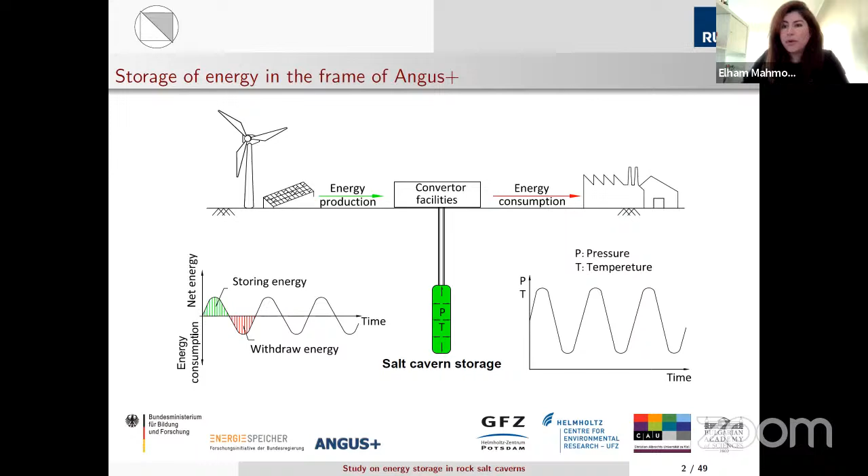But rock salt, as a viscous material, is very sensitive to temperature, and can show movement and deformation from this loading and unloading, and from temperature changes. So we need to tackle the problem from different aspects. We don't explicitly know how the material reacts to this type of cyclic loading and unloading, which is not cyclic with a frequency higher than 8 hours, and it's cyclic not just mechanically but also in temperature.

That's why, in the bigger research group, we made an experimental investigation as one important pillar for the project. We decided a PhD should work on how a triaxial cell and a creep test can be performed on samples of rock salt.

The other aspect is that we can observe this experimentally, but we also need to make a numerical model to predict the behavior before putting compressed air or hydrogen inside the cavity. That's why we also thought about constitutive model development.

Another PhD has been assigned to develop a constitutive model able to consider all of these aspects I was speaking about. The last part, of course, is about analyzing the system.

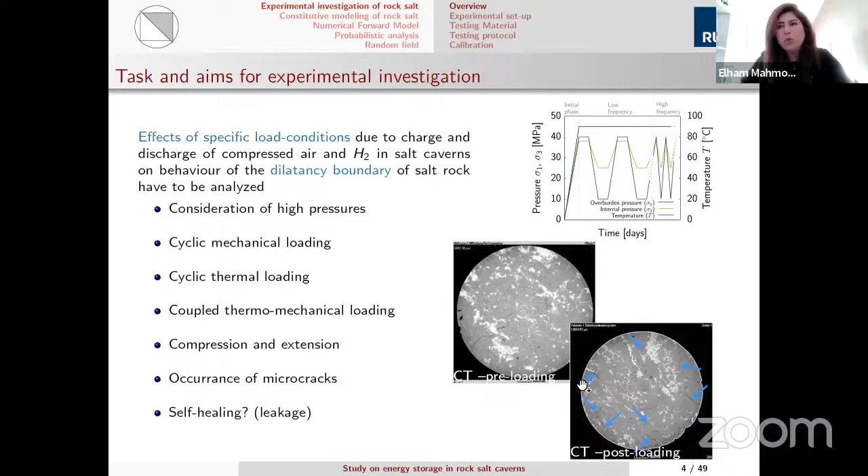Just mentioning here how I provided some information for this analysis was that I had the numerical analysis, and I made some first preliminary work to see how the stress paths look like when we are loading and unloading the system, and also in different areas around the cavity, how the stress path is different. So we could give this as a boundary condition to the device, and ask the person who was responsible to simulate or try to simulate this stress path.

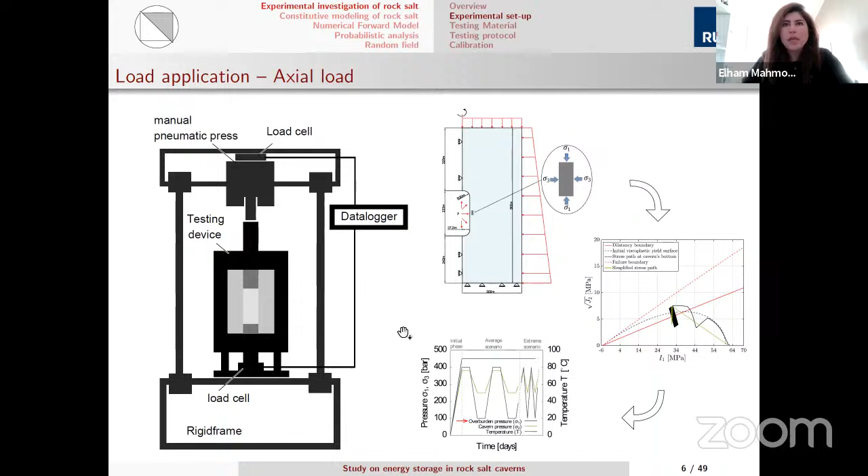Here also you can see how the rock salt looks like, actually very crystallized, but from different areas from Germany we got different samples. This one that I show here is from Sondershausen mine, a salt mine in Germany, where we could get the data from 500 meters underground. So it's not normal geotechnical depths of excavation that I'm speaking about.

Moving forward, I told you about the constitutive model and how and why we need a constitutive model. Actually, I tried to put them in these three pillars, why a new constitutive model was needed. Because beforehand, we had some constitutive models that were working for the creep, of course, and some that can also model damage in the elastic behavior and cyclic behavior. Also, there are constitutive models that can work for viscoplastic materials like rock salt. But all in all, there was a lack of that.

You can see we have different loading conditions in such cavities. So we had to consider a new constitutive model, which is a combination of the other available ones, but it came also with its own development works and challenges, because we wanted to know about the fatigue after cyclic loading. At the same time, we wanted to know about the creep behavior, because we have constant loading during every 8-hour shift, or if it's about hydrogen, even longer shifts of constant loading. So the creep may happen under that loading, and of course monotonic loading during the charge and discharge of the cavity was the boundary condition that we had.

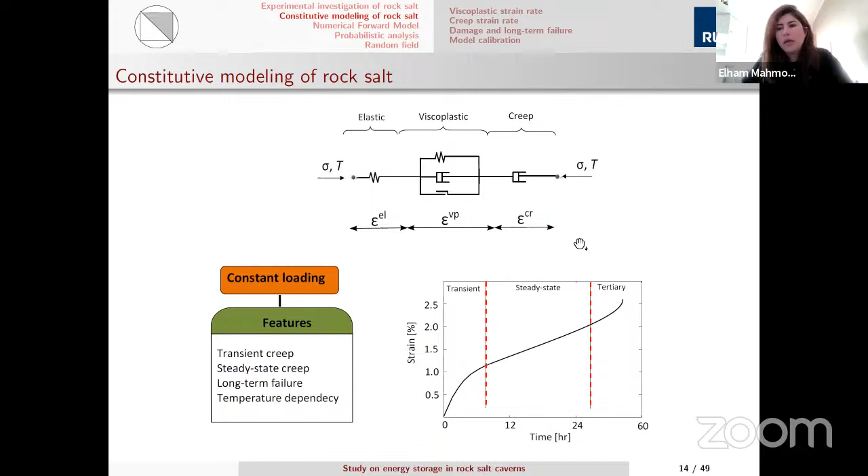So let me just jump over some of the slides. Otherwise, my time would be very, very limited for the part that I'm more interested to show you. This is also about the fatigue part of cyclic loadings.

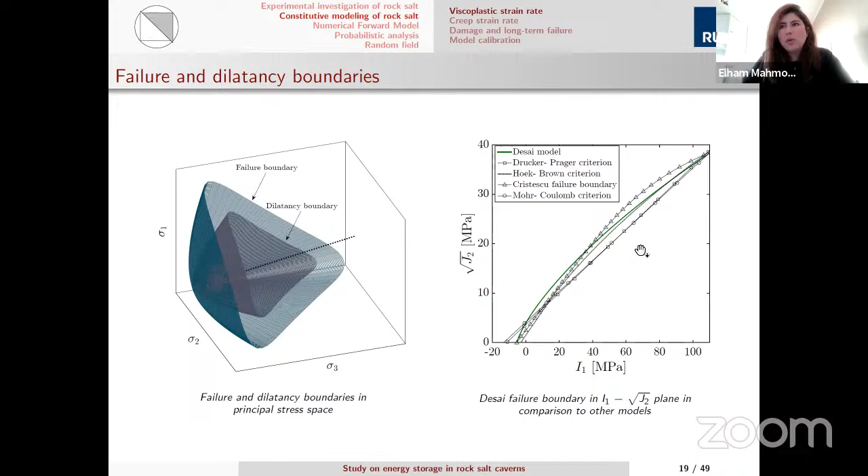I also put here the dilatancy and failure boundary of the model, which was developed by my colleague González. We worked on this model in the direction of having firstly the basis of a viscoplastic model, which we call the Desai model. Of course, one very important aspect about rock salts is volumetric change in the volumetric strains, and after a certain boundary, we have dilative behavior.

This green line here shows how the dilation and compression zones are different. Under this line is compressive behavior. In the community, in practice, they always want to stay under this line, but of course there are cases where the stress passes it and goes into the dilative zone.

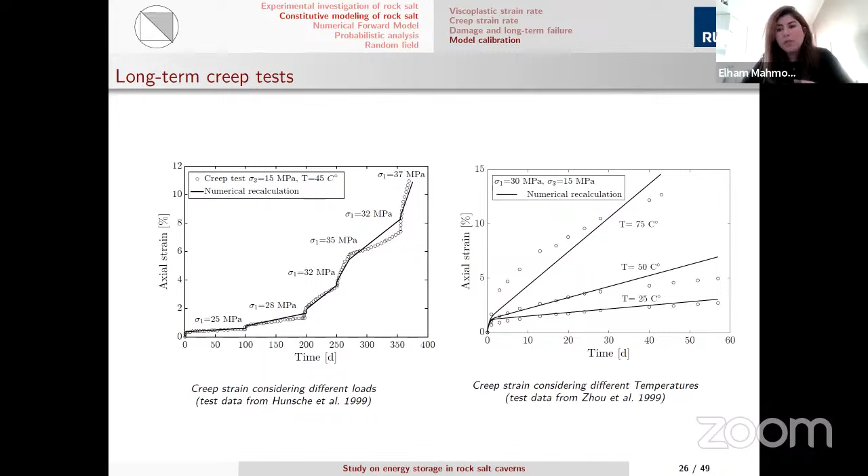This is how I started modeling the cavity. This is the area where the cavity normally takes place. For the Sondershausen case, it was almost 800 meters under the ground, with 500 meters of overburden, but some excavation happened at 800 meters. The rock cavity has 233 meters of height, going deep.

This cavity is simplified in shape, but the shape is almost the same, not much irregularity, though maybe on the bottom side there are some irregularities. We also did some studies with master students on how these affect the stress distribution—quite interesting work, but unfortunately I cannot share it because it was under contract with some companies in Germany.

Let me bring you here also with this 75 meters of diameter—this is the model I made. It's axisymmetrical, a numerical finite element model, with different points around the cavity that were points of interest for us.

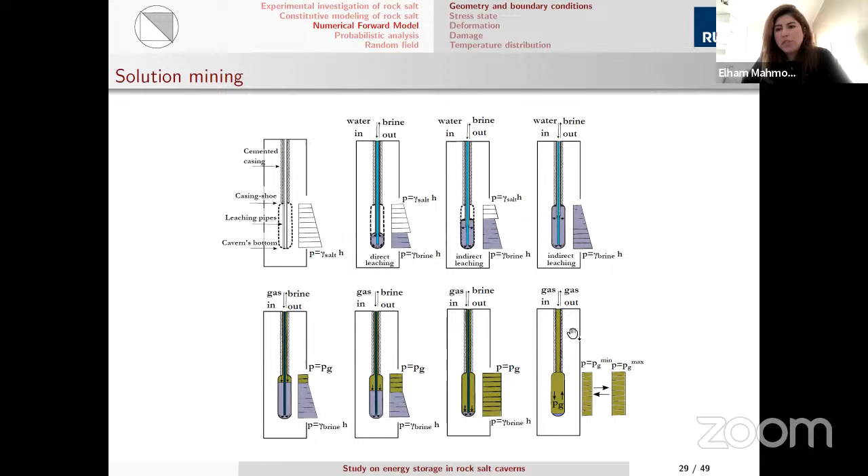After that, the charge and discharge happens, which is mainly the cyclic part of the job. This is how the loading during the time has been modeled, simplified of course. This is the PI that I applied, and this is the graph for that.

Important for people in practice is always how much they are allowed to come down in this graph. The P min value is always a point of interest for them, because they want to know how much less can be stored in the cavity.

This is something very interesting about rock salt storages, because normally if you're working with tanks or any other type of storage, you're thinking about how high the capacity is, and how much pressure or temperature I can apply to the system, because the walls or boundaries can take it. But here specifically, the minimum is also important.

Why is it so? Because as I said before, rock salt shows some viscosity, and without any loading from inside, the hydrostatic pressure in the body of the rock mass is high enough, and with time the viscosity will force the cavity to close. This is what is really happening in many different areas.

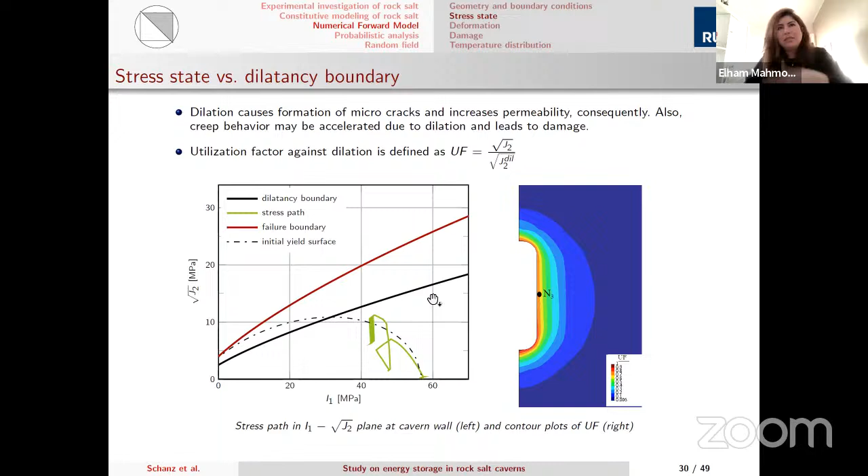Which is not something desirable. So what we can see here is that I have tackled the problem in several ways. One is that we do not want to have the problem of dilative behavior, staying under the dilatancy boundary and in the safe zone, because we do not want to get any micro cracks. Also, we do not want to have any volume loss, which is another problem, a serviceability problem. Both of these problems need to be solved and considered in the reliability cases.

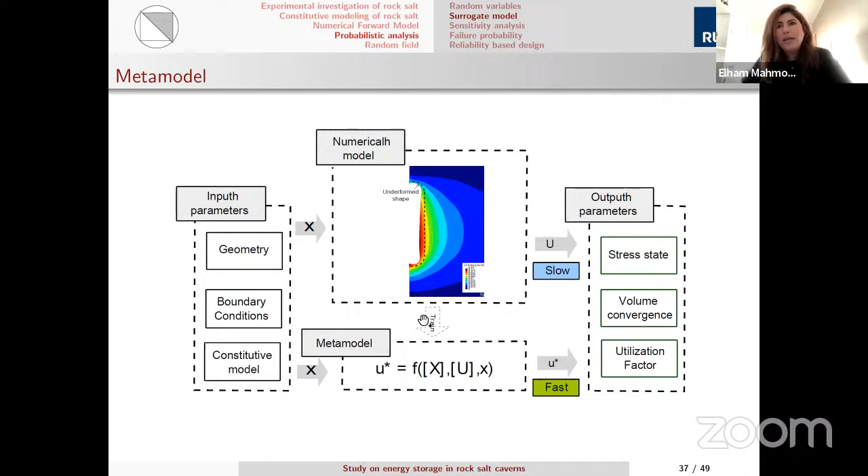I have to go a little faster and show you how I considered the parameters for this analysis, because the parameters are not very certain for us, and there is a high range for all of the parameters involved - we are speaking about more than 30 parameters here. All of them need to be identified, and for identifying these parameters we did some sensitivity analysis, which is systematic and global, because all of the parameters were also correlated somehow with each other.

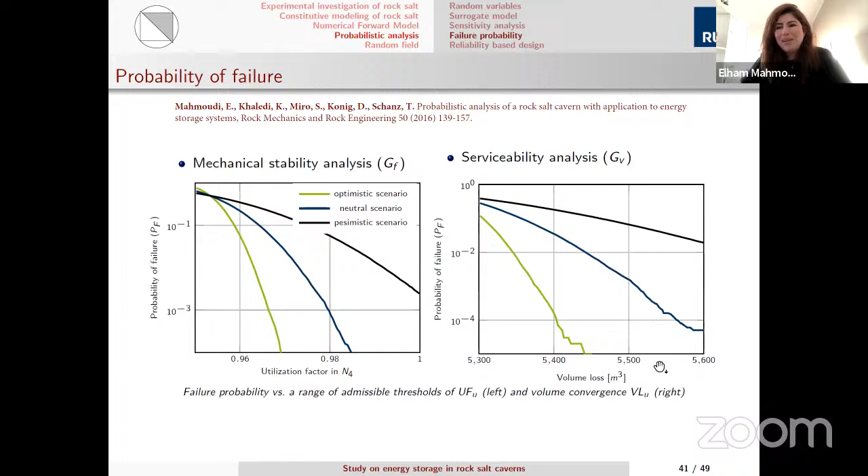After that, we considered some reliability-based aspects to inform the client and the operator, that in taking these values we are delivering to them, how much chance are they also taking. They were interested in serviceability and stability at the same time. So they wanted to know how much of the values for the minimum pressure they can apply.

So I had to come up with some concepts in reliability which are also able to do the calculation very fast, because if I wanted to do Monte Carlo calculation, tens of thousands of calculations were needed, and every finite element calculation with this extensive constitutive model was taking me more than one day. So I could not afford that, and I came up with one surrogate model idea, and also some more advanced reliability analysis idea, shown here as subset simulation.

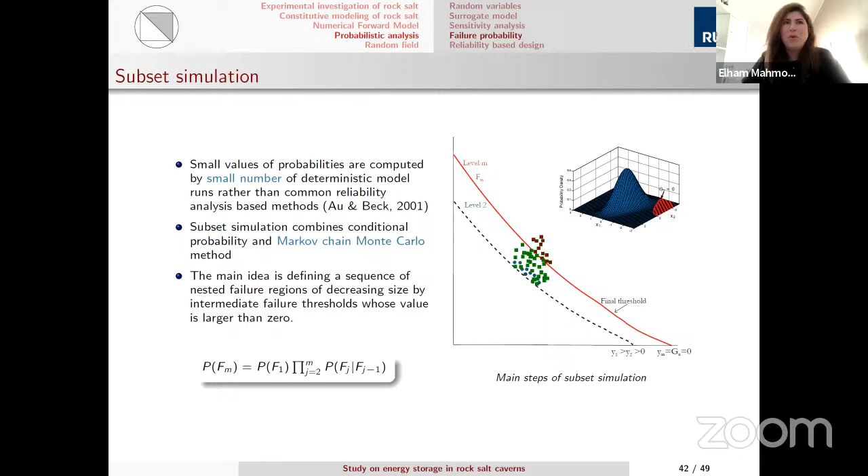But let me go faster over this - you can find all of this information in the papers, where we got data like this for the practice. When I applied the reliability for the specific type of structure, the index of reliability, then I could say how much pressure the practitioners on site should apply while staying safe. This is how our journey started, from very specific questions, ending up with some data analysis and probabilistic analysis.

I hope you got some ideas about the job. It was not very detailed, but I assume that if you have any more questions, I would be happy to answer. Thank you, Alessandra, I think it's time.

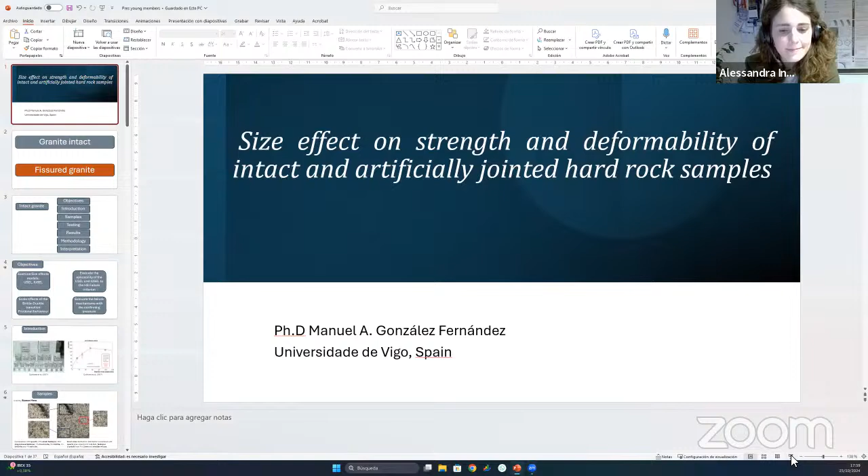I'm going to talk about the size effect on strength and deformability of intact and artificially jointed hard rock samples, which is part of my thesis. Due to the extension of my thesis, I only focus on these two parts. So we start with the intact granite. I have divided this presentation into 7 different parts.

Let's begin with the introduction. What was the reason to look into the scale effects on triaxial tests? The laboratory I used to belong to at the University of Vigo performed a past study on the same rock, granite Blanco Mera, in this case on UCS tests. They found an ascending-descending trend of the peak strength with increasing diameter. This trend doesn't fit the typical descending trend with incremental diameter, so we decided to perform the same study but extended to a triaxial compressive test.

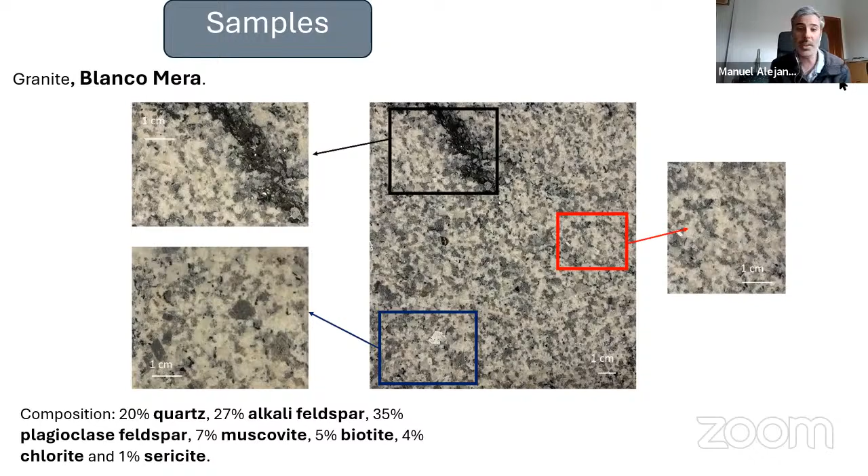So we used the same granite as the past study, the Blanco Mera, whose composition is 20% quartz, 35% plagioclase feldspar, 27% alkali feldspar, plus muscovite, biotite, chlorite, and sericite. Regarding grain distribution, it is scattered with quartz grains ranging from 1 to 6 millimeters, feldspar crystals ranging from 1 to 3 millimeters, and smaller micas.

So we decided to use for this study 4 different diameters: 84 millimeters, 54 millimeters or NX diameter, 38 millimeters, and 30 millimeters. During the test, we also measured deformability using two different methodologies: the first was measuring with LVDTs the plate-to-plate distance, and we also measured deformations with axial and radial strain gauges.

This is not the main objective of this part of the study, but in the future we will see what was the reason to measure the deformations.

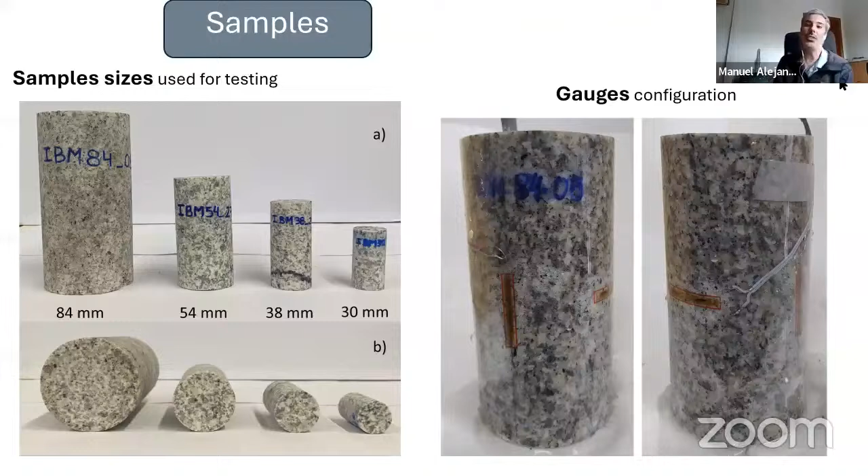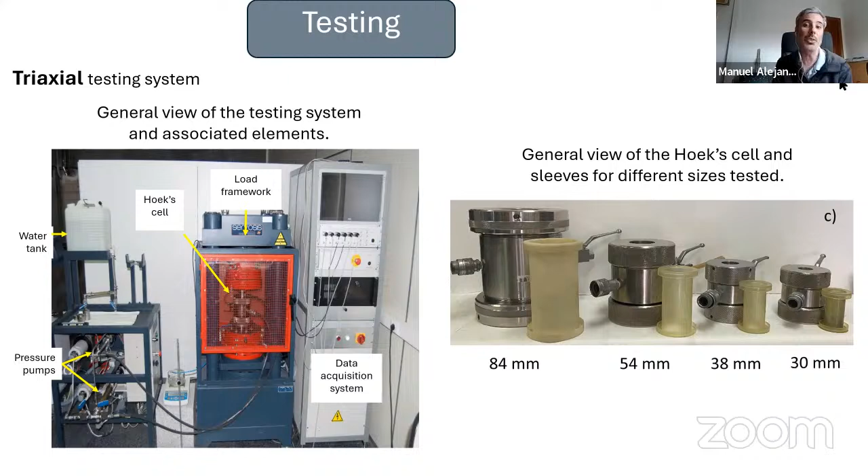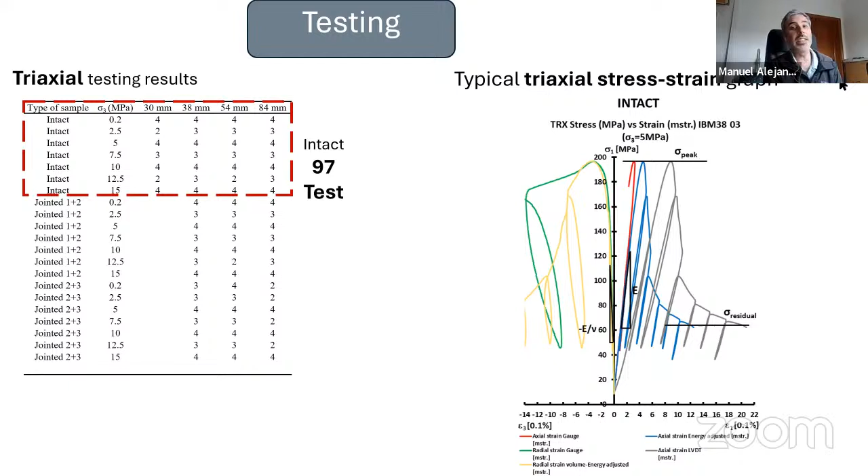Now here we can see all the tests performed in the whole study on the granite, both intact and jointed, but here we only focus on the intact ones. We performed 97 different triaxial tests for intact specimens. On the right, we can see the typical triaxial stress-strain graph, showing the curves of stress-strain, radial and axial, and how the parameters were derived: the peak strength and residual strength here, and the elastic parameters for the part we will see in the future.

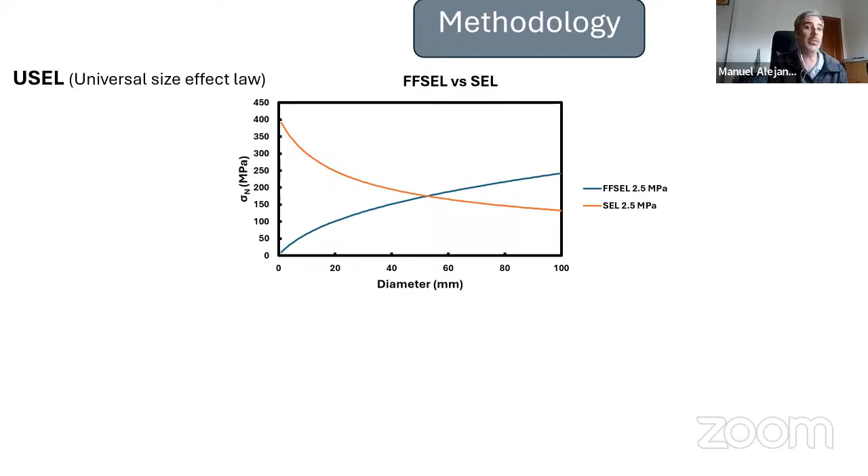So to analyze these results, we decided to use two different methodologies. The first one was the universal size effect law, which consists of two different parts. The first part is the descending trend proposed by Bazant, called the size effect law.

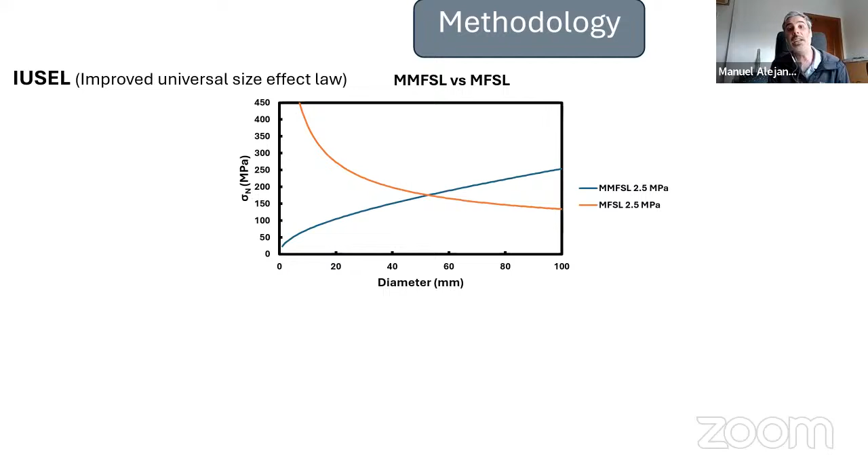And the ascending part is also proposed by Bazant, the fractal fracture size effect law. So the value of the strength will be the minimum value at each point between the SEL and the FFSEL. We also used the improved version of this universal size effect law, which consists of two different parts: the first, proposed by Carpinteri, the multifractal scaling law or MFSL, which is the descending part.

The ascending part is a modification of the previous one proposed by Carpinteri. This modification was performed by Masoumi, and it's called the modified multifractal scaling law, or MMFSL. So like in the USEL, the value of strength will be the minimum value at each point between the MFSL and MMFSL expressions.

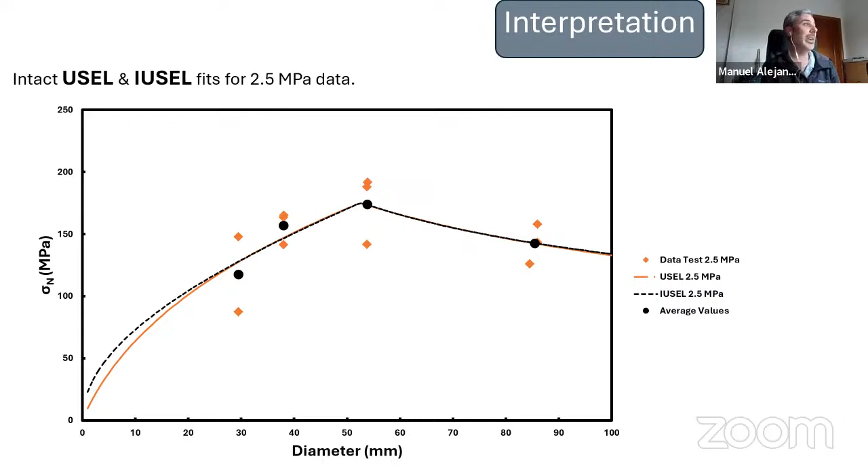Here we can see a fit of the values obtained for the tests at 2.5 megapascals of confining pressure. Both models, the USEL and the improved version, fit very well with the results obtained, and mostly overlap. So why did we decide to use the improved version and not keep the original? This happened because when you make the fit for larger diameters, the original USEL tends to zero at larger diameters.

That is not the reality. We know that a rock mass with infinite diameter also has a strength. So the improved version is such that when we tend to large diameters, it tends to a constant value that matches reality.

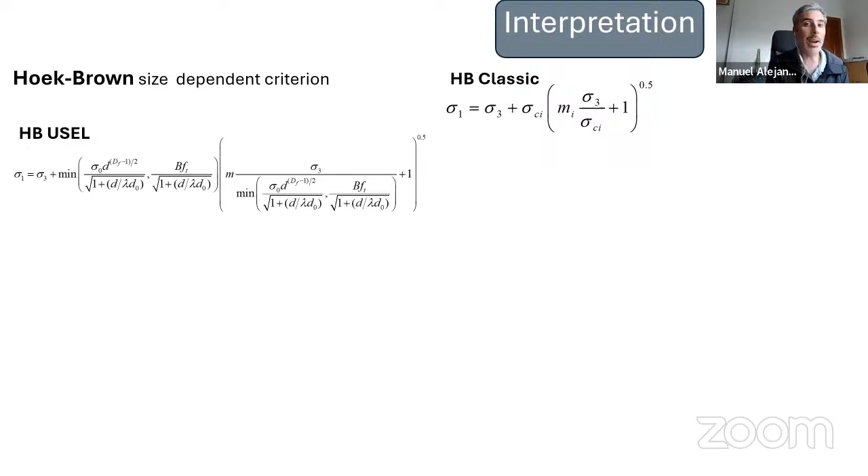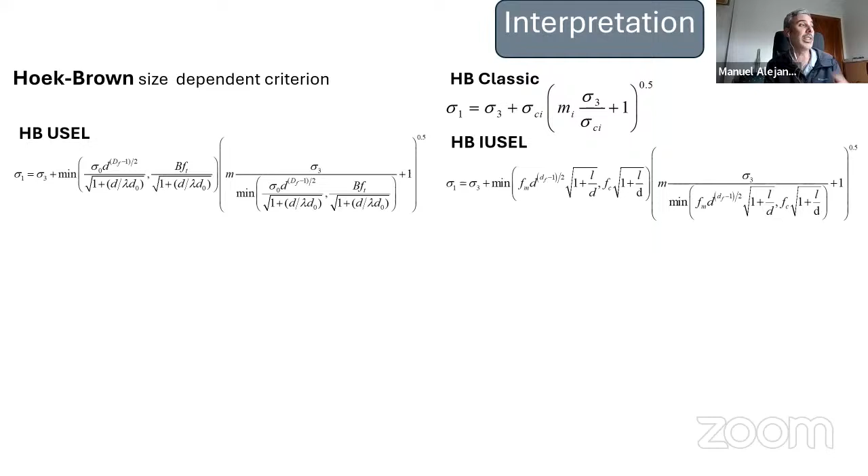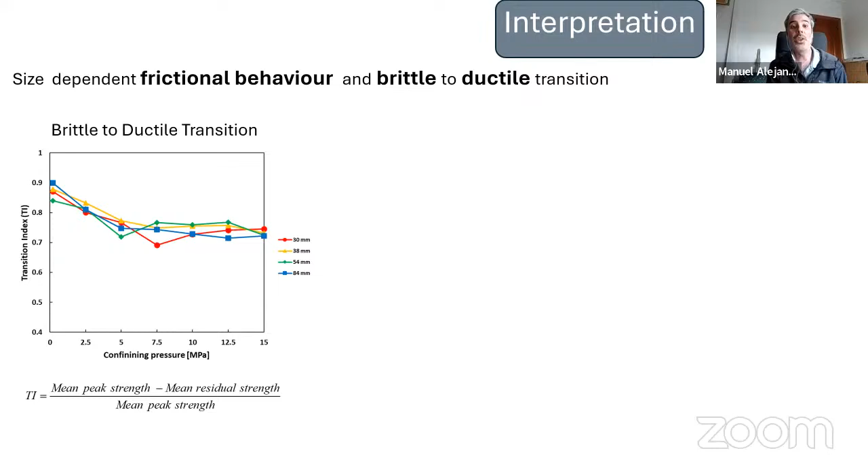We can observe here that our rock used, the granite, is very brittle, because it's close to 1. And we can see a transition to a more ductile behavior with the increasing of the confining pressure.

We have also measured the shear band angle of all the tests performed. Clearly, the shear angle at near 0 confining pressure was impossible to measure.

We observe for all the diameters used that the shear band angle decreases with increasing confining pressure. So with this data and with the expression of the shear stress and the normal stress...

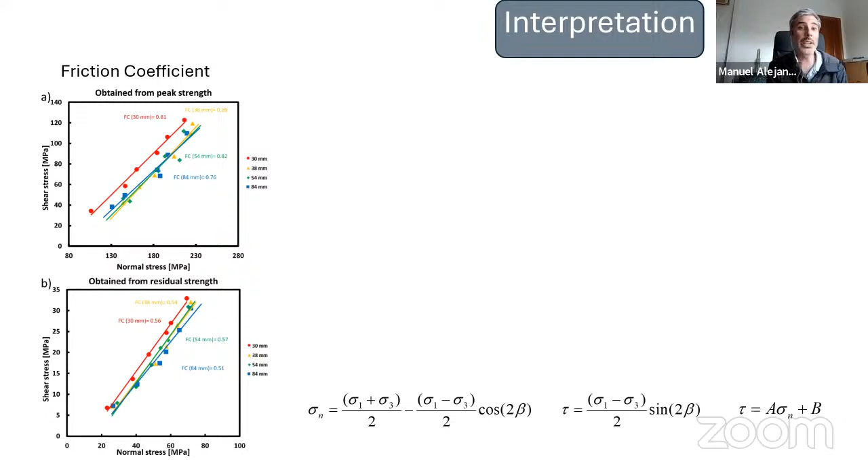We can plot the friction coefficient both for the peak and the residual strength, and obtain the values for each diameter.

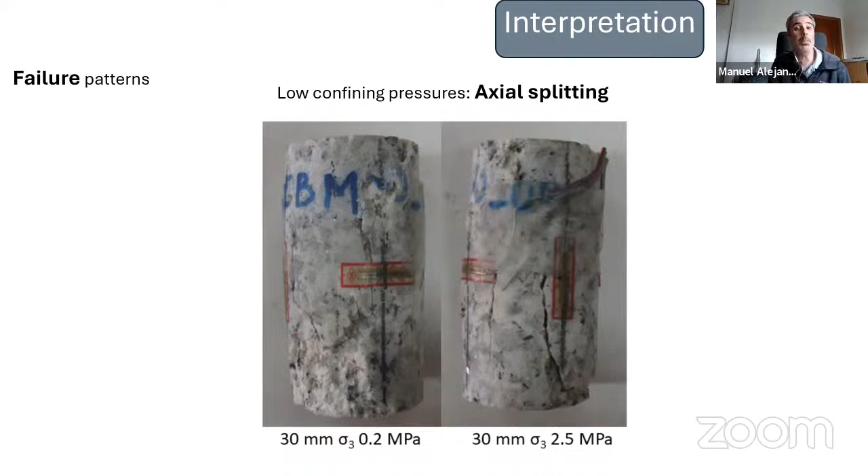Regarding the failure patterns, for low confining pressures we find axial splitting, moving through a mixture of axial splitting and starting shear banding for mid confining pressures, through to a full shear band pattern at higher confining pressures.

So we move to the next section, the fissured granite section, also divided into 7 different parts. So which were the main objectives?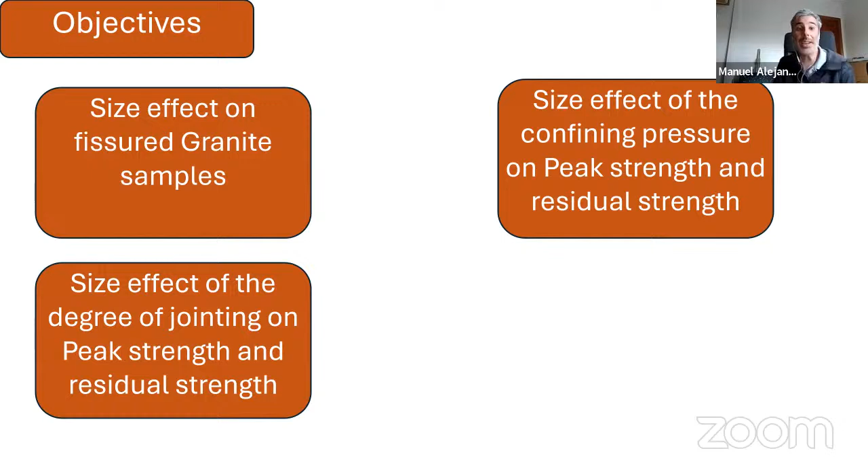The first was to examine the size effects on the fissured granite samples, examine the size effect of confining pressure on peak and residual strength.

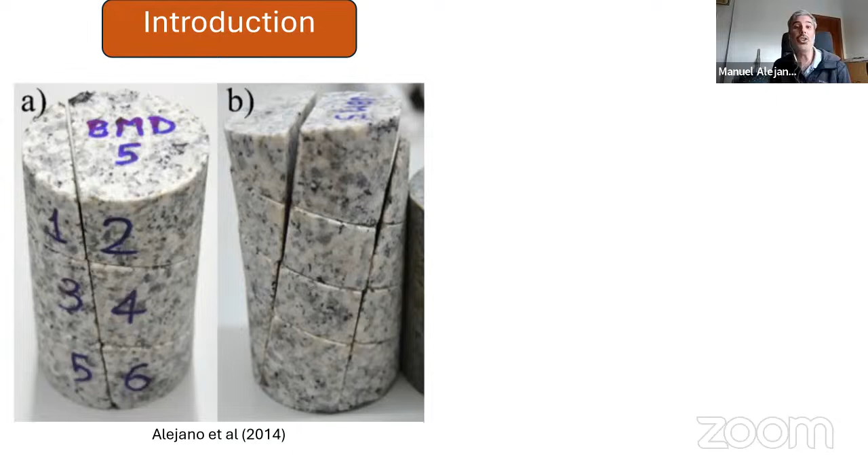Also examine the size effect of the degree of jointing on the peak and residual strengths, and examine the size effect on the deformability of the jointed samples through the elastic parameters. In our laboratory, we have performed in the past a study with the same granite, the granite Blanco Mera, jointed tests, but they were only focused on...

NX diameter of 54 millimeters. Why did we perform this study on a hard rock?

This was because there were not many studies on jointed samples, and the existing studies were based on artificial materials like cement or plaster, or soft materials like gypsum. So our laboratory decided to perform this study.

And we took another step to see the scale effects on jointed samples.

So I'm going to explain briefly how the samples were obtained. Here we have the typical block for sample obtaining, and we mark the subvertical joints.

Then we cut it using a saw, and then we clamp it together to proceed to drill with a core driller.

Why should we perform this first? If we obtain the core first and then perform the subvertical joint, we obtain a reduction in the diameter of the sample, so it will not be usable to obtain results.

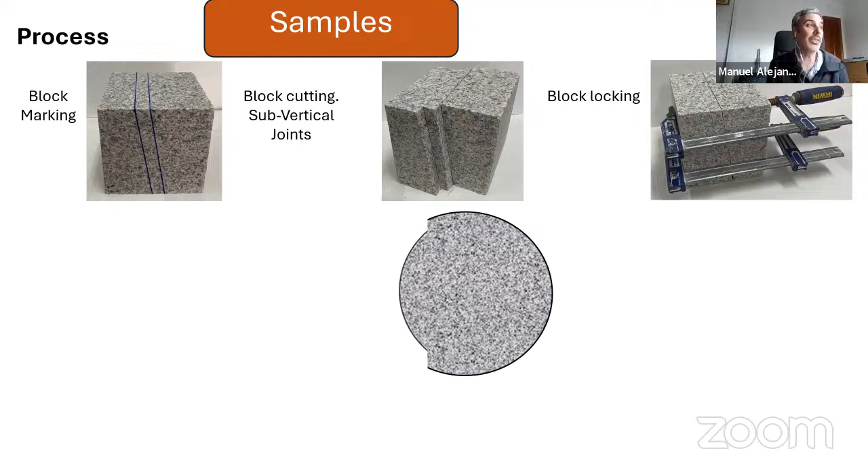So we obtain the cores, where here we can see the subvertical joints, and we use electrical tape to grab the core.

We cut the endings to obtain more or less the length of the final sample.

We proceed to grind the ends to obtain a smooth surface, and then we secure this sample to a 3D printed mold to give the proper angle to the subhorizontal joints.

Then we cut the horizontal joints, and to finish and conclude we have the sample shown here in the next slide, and we are going to see the different samples used in this study.

We have diameters from 38 to 84 millimeters, like in the past study. We don't use the 30 millimeters.

At the left, we are looking at the 1+2 sample with one subvertical joint and two subhorizontal joints, and the 2+3, meaning two subvertical joints and three horizontal joints.

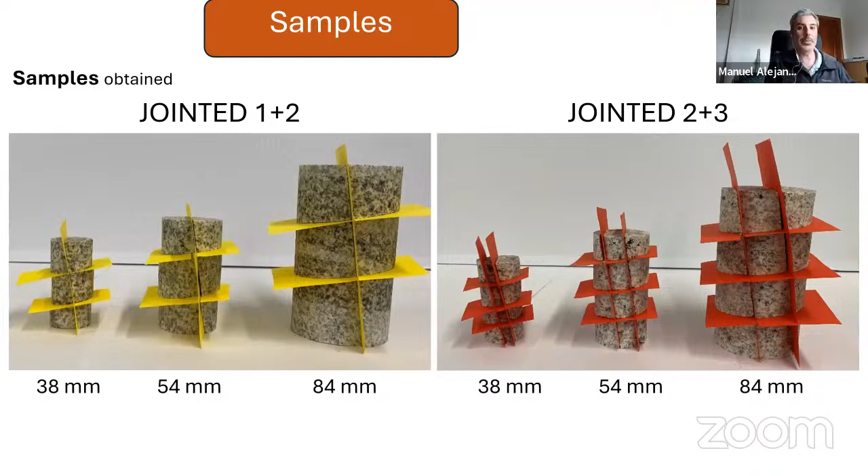The triaxial test system was the same as in the past part, with different Hoek cells used and the corresponding sleeves.

As I commented before, we performed 97 triaxial tests for intact samples, 72 tests for jointed 1+2, and 69 for 2+3.

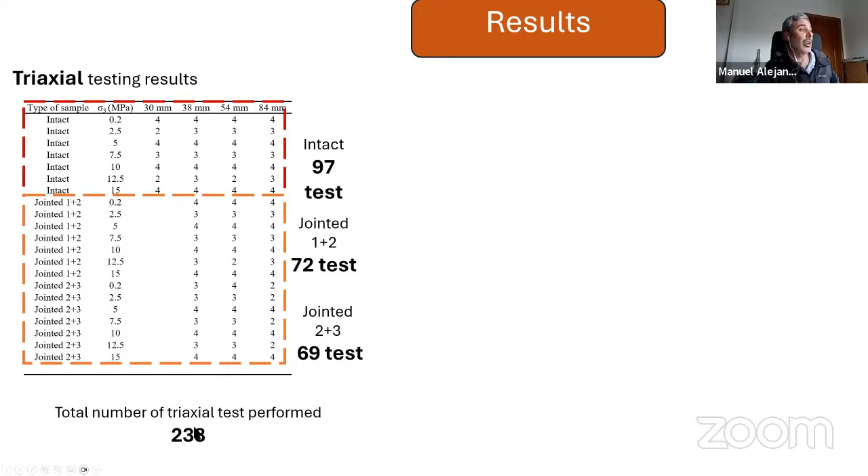In this case, for intact samples we used to measure the deformations using strain gauges and...

LVDTs, but in this case for the jointed specimens, we only use the LVDTs.

Because if we attach a strain gauge onto a piece, it will not give us a realistic measure of the strain, it will give us a strain measure of only the rock part, not the whole specimen.

So here we can see the different average results for each sample diameter and confining pressure, for intact, for jointed 1+2, and...

2+3, sorry. As we can see, when we increase the confining pressure, we can also see that the peak strength increases.

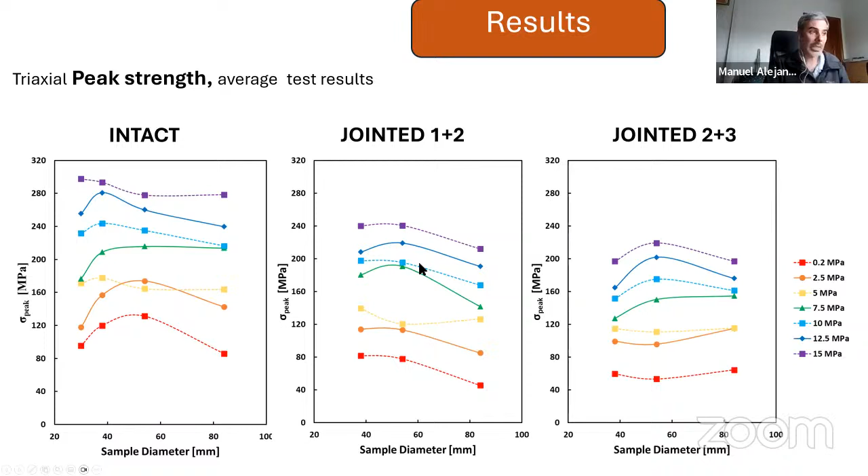And here we can see for the jointed 2+3 and 1+2 that there is very little descending trend for the peak strength. Also for the residual strength, we can see that it's increased with increasing confining pressure, and we can see here clearly that the residual strength has barely been affected by the size of the sample, and has a slight effect from the level of jointing of the specimen.

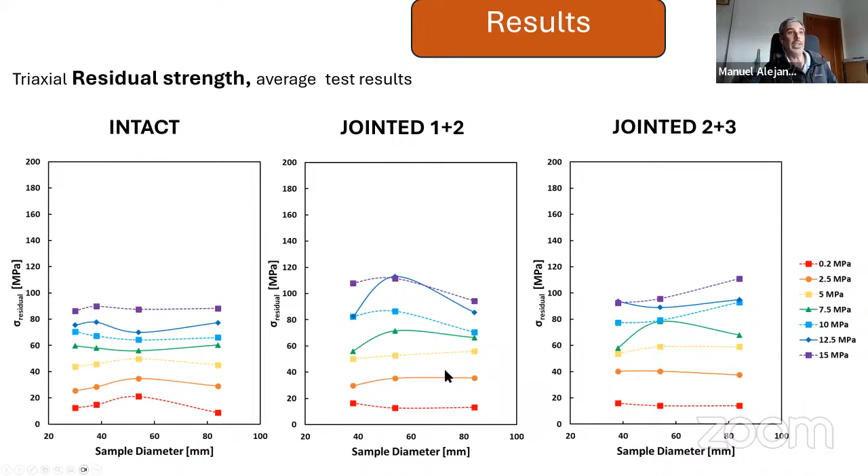So we decided to use the Hoek-Brown criterion for rock masses to interpret the results of peak and residual strength, because it has the GSI parameter that is closely related to the level of jointing. So we thought it would give us a good interpretation of the results.

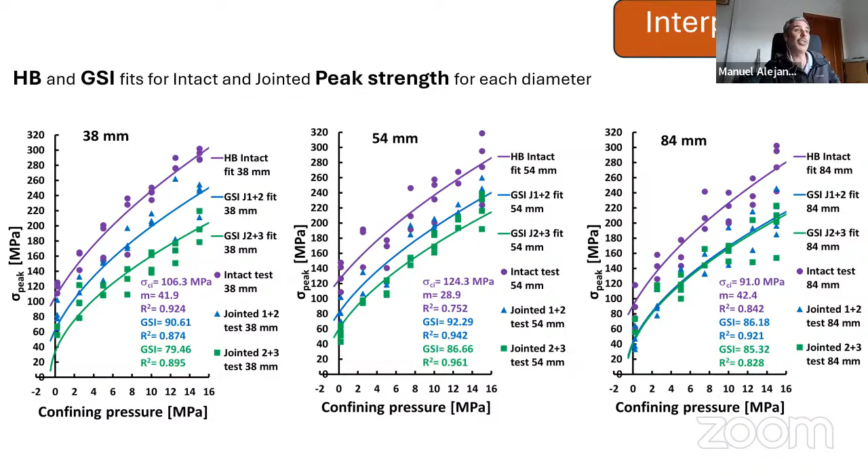So here we have the results obtained for each diameter, and we can see that for peak strength, the results decrease with increasing level of jointing. Something clearly remarkable is that for 84 millimeters, for large diameters, the level of jointing has less effect on the peak strength. So when we increase the diameter, the effect of the level of jointing tends to decrease.

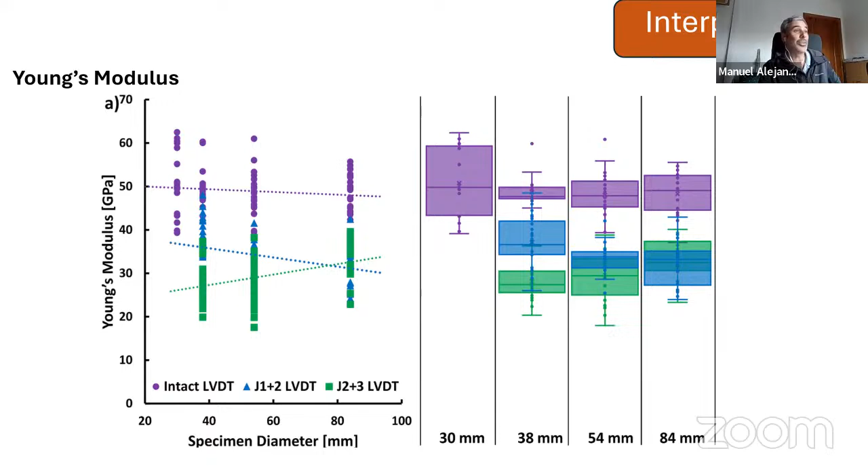For the elastic parameters, we observe that the Young's modulus with diameter more or less stays the same, with no variation or a slight tendency to decrease. With confining pressure it tends to increase, but the clear trend is that when we increase the level of jointing, the Young's modulus tends to decrease.

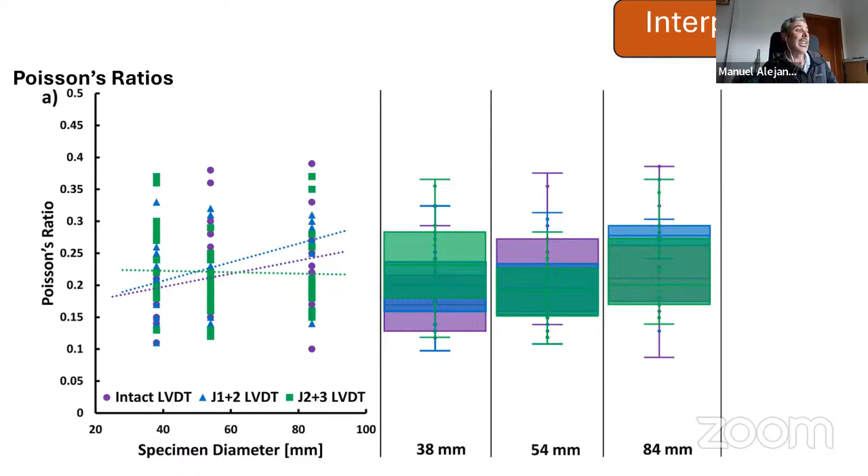Poisson's ratio tends to be more or less constant with increasing diameter. It has a slightly descending trend with increasing confining pressure, and it seems to keep constant with increasing level of jointing.

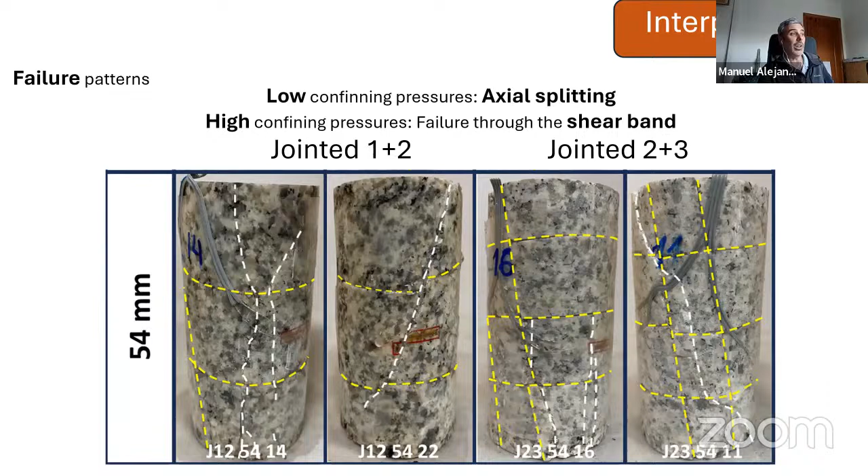Moving through the failure patterns, we can see the same patterns obtained in the intact ones: moving through low confining pressures we have obtained axial splitting, through to shear band for high confining pressures. And we have found this for all the different sizes.

So to conclude, to predict the strengths, the models used showed good agreement with experimental data. We observe a double trend, and this analysis suggests that we can introduce a size dependency on the Hoek-Brown criterion. For the jointed section, the reduction of strength is based on two main factors: the presence of joints and the increasing diameter.

Regarding the elastic parameters, we can say that the Young's modulus tended to decrease, and the Poisson's ratio tends to remain constant.

These two works can be seen in the published papers, for the granite intact ones in Rock Mechanics and Rock Engineering, and for the fissured granite in the International Journal of Rock Mechanics and Mining Sciences.

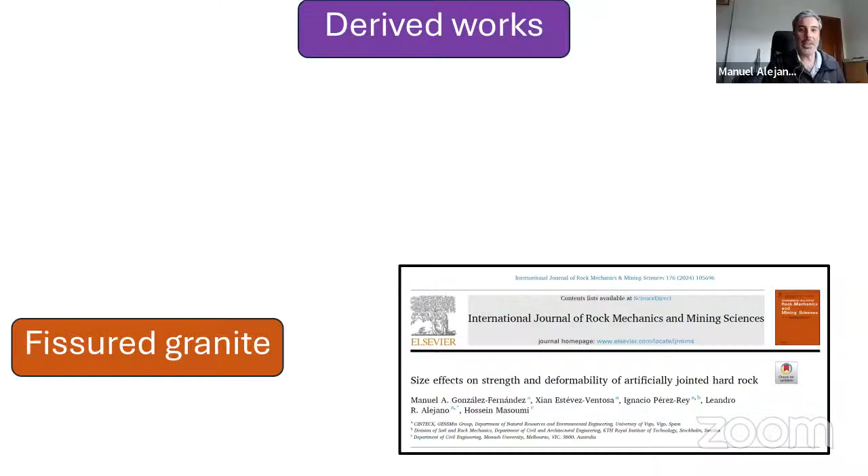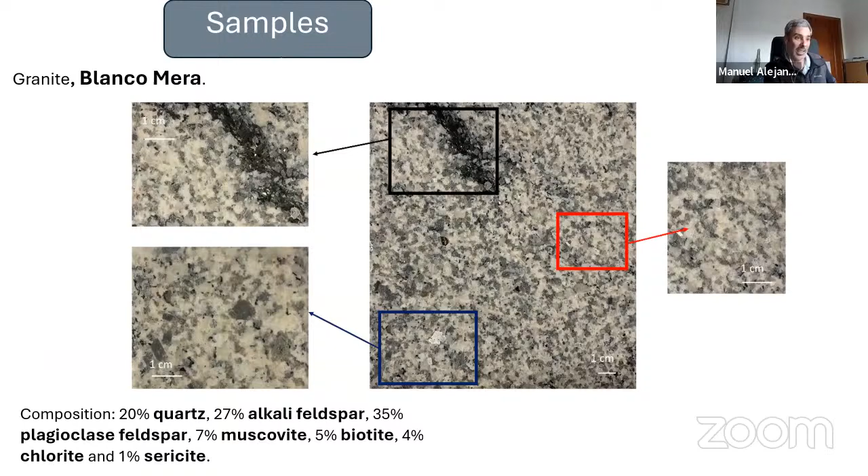This ascending part is due to the grain size. We consider the ISRM recommendation for performing a test, that the diameter of the sample should be at least 10 times the grain size. When we have such a large grain size, like here where we have 6 millimeters of quartz grain size, you can obtain premature breakage at the grain size boundary. So with small samples of 30 or 38 millimeters, the failure follows the grain size. The other part is due to weakest link theory - you're more likely to have a failure if you have more surface area, and thus more likely to have a defect.

Sure, okay, thank you very much for the quick explanation. No, but it's clear, yeah, it's clear, thank you very much.

Any other question? Lina.

There is a question from Eliane Cabot asking if you can reshare the paper references from the last slide, well, the second to last slide.

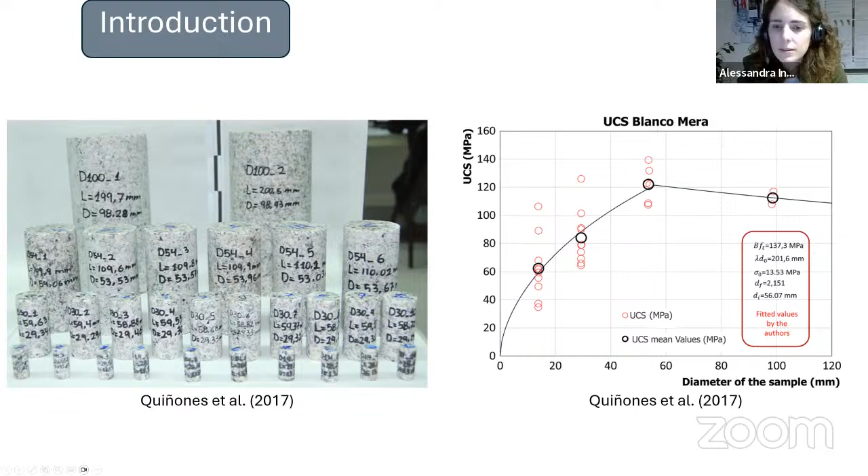Okay, I'm going to - well, maybe the video, if I remember well, will be available again on YouTube, so people can go and find exactly this one. It's better though, you can see it here on my slide.

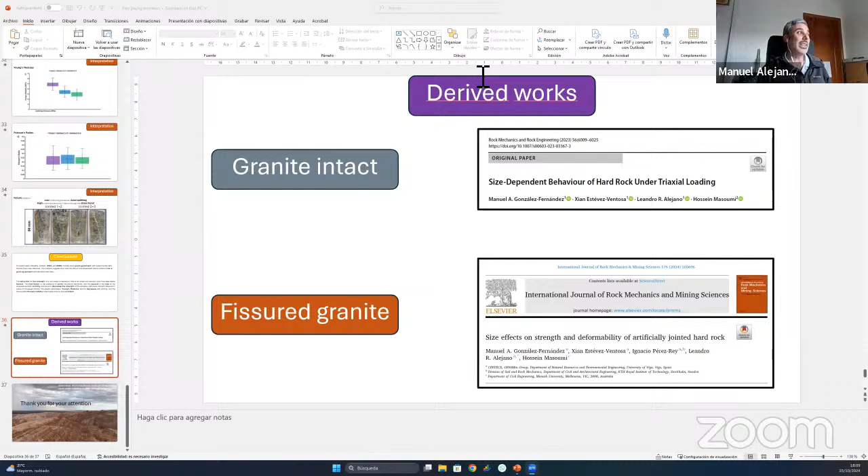There are areas for improvement, for example in the process of making the sample preparation, because you have to be very careful. I can tell you that for the 38 millimeter diameter, we performed 25 tests, but I prepared nearly 60 samples that were not usable. So in total I prepared 90 samples - it's time consuming, and there's variation too, if I show you here... I don't have all the samples here.

No, yeah, I have it - I have all the results for the intact ones. So you also have variation in the intact samples that we can attribute to the natural variability of the rock. We can say that more or less they are in the same range, which is something expectable. So I can say that for preparation, we have an area for improvement.

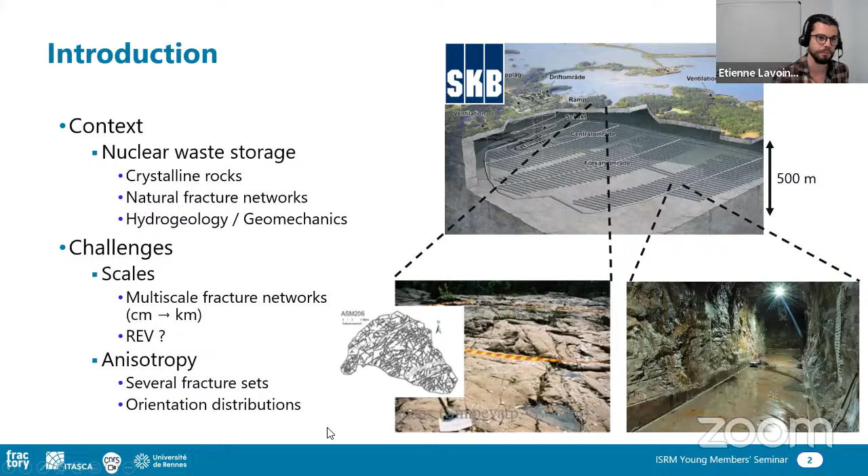Our goal in this project is to quantitatively assess the relationship between pre-existing natural fractures and rock mass effective properties, including elasticity and strength, though I will focus mostly on strength here. We use this to develop a prediction workflow for when classical rock mass classification systems assumptions are not applicable, and also to understand the underlying physics that relate the fractures to the properties of the fractured rock mass.

To do so, we base our analysis on numerical simulation using the synthetic rock mass, but also using a discrete representation of the fractured rock mass based on the discrete fracture network approach. All these concepts are going to be developed just after here. It is widely accepted that fractures decrease the strength of rock masses in comparison to intact rock.

We have seen that just before in the second talk. And very often we rely on empirical approaches using rock mass classification systems such as GSI, for example, which is based on quantitative and qualitative observation that you have on the field or in the lab, depending on the fracture parameters, for example.

So this may be limited when you want to apply it to in situ scales and fracture anisotropy. This is adapted to heavily jointed rock mass when you have really a block assembly. As soon as you have an assembly of blocks made by several sets of potentially infinite fractures, the density of the fracture network is only defined by the fracture spacing. So it is applicable only when the model resolution is larger than this spacing.

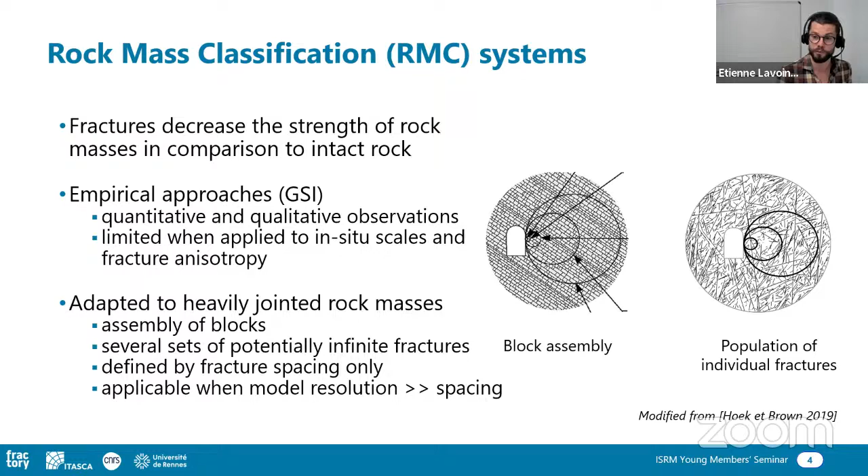And because of this spacing, because of this block assembly, you have the possibility to have a representative elementary volume, which may not be the case in the kind of rocks that we are looking at, crystalline rocks, where you have a population of individual fractures, and you may not have these characteristics. So to study this kind of medium, we use the discrete fracture network approach.

In this approach, the fractured rock mass is seen as a collection of fracture surfaces that we call the discrete fracture network, embedded in an impervious elastic matrix. So a lot of physical concepts rely on the fractures themselves. These fracture surfaces are defined by statistical distribution. You have one statistical model, but you need several realizations.

For example, you go in the field, you take some data, so you have orientation data, you have size data, and then you create a conceptual model, a mathematical model, where you define different fracture sets, different statistical distributions for the orientation, but also the size distribution.

So here you can see the size distribution that is fitted by a power law model, meaning that you have a lot more small fractures than large fractures. And once you have this statistical model, you need to perform several realizations to quantify the uncertainty associated with such a model. And one of the most important things to consider with fractured rock mass is the fracture density.

And depending on the process at hand, it may be relevant to use different ways to quantify this density. In 3D, the two main ways we have to consider density is fracture intensity, which we call P32, defined mathematically as total fracture surface per unit volume. But you can also define fracture density using the percolation parameter, which is defined mathematically as total excluded volume around the fracture per unit volume.

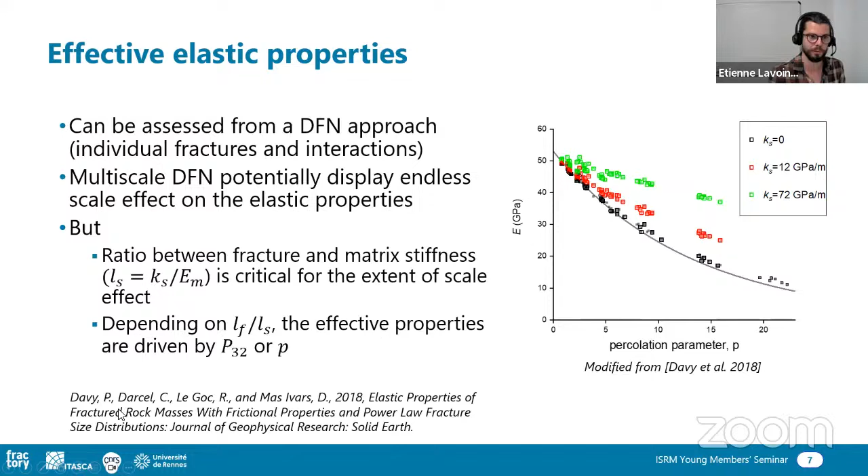Here we're interested more in strength properties, and to do that, we need to be able to simulate damage. To do that, we use the bonded block model approach using the Itasca 3DEC software, where the rock is modeled as a bonded polyhedral element.

So here we model the matrix as an assembly of tetrahedral bonded blocks, meaning that the blocks are stuck together. So the blocks, if I zoom in and have a schematic view here, the blocks are deformable and they are stuck together with friction, what we call subcontacts that may break or not.

We also embed the fractures in this kind of model. The fractures are represented by overprinting cuts on the intersecting blocks, so that in the end you end up with subcontacts that are assigned matrix properties and fracture subcontacts that are assigned fracture properties. The matrix subcontact may fail if the stress is sufficiently high, and then the fracture properties are assigned to this subcontact, which we call a crack subcontact. So the rock damage is captured by the rupture of intact subcontacts.

So to study that, we covered a wide range of parameters for our DFN analysis. We performed UCS and tensile numerical tests on 120 synthetic rock mass specimens generated from various DFN. We performed analysis on constant size distribution, so here all fractures have the same size, here 2 and 1, and also with power law fracture size distribution with different exponents, meaning that you have more or less large fractures than small fractures.

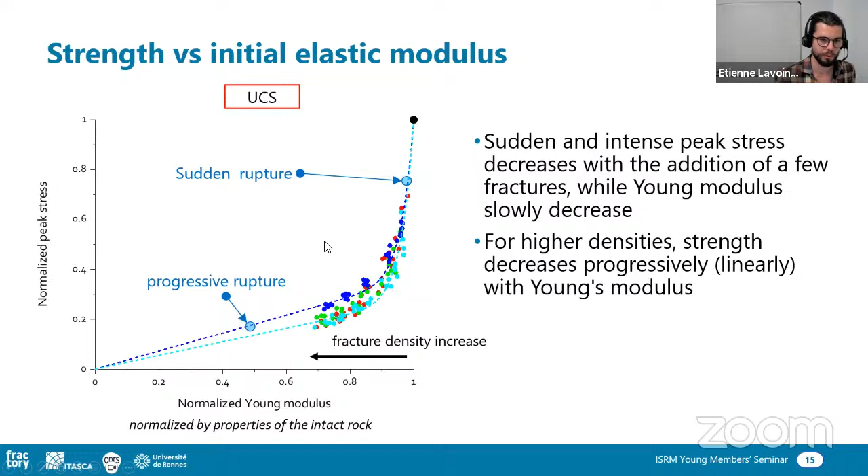So to conclude, we used the DFN-SRM numerical setup, for discrete fracture network and synthetic rock mass, to better understand the relationship between pre-existing fractures, the natural fractures in multi-scale environments, and relate it to rock mass effective properties, both elastic and strength properties.

This is still ongoing work on the strength properties. What we have shown is that the fracture with the highest amount of energy, characterized by the parameter PM, is responsible for damage initiation, and that the strength of the fractured rock mass is strongly controlled by the initial value of PM, which is a mix of the fracture's geometrical and mechanical properties.

So I hope it was clear enough. Thanks for your attention, and I will be really happy to answer questions, and go back to a few slides if needed to go a little bit deeper into the subject.

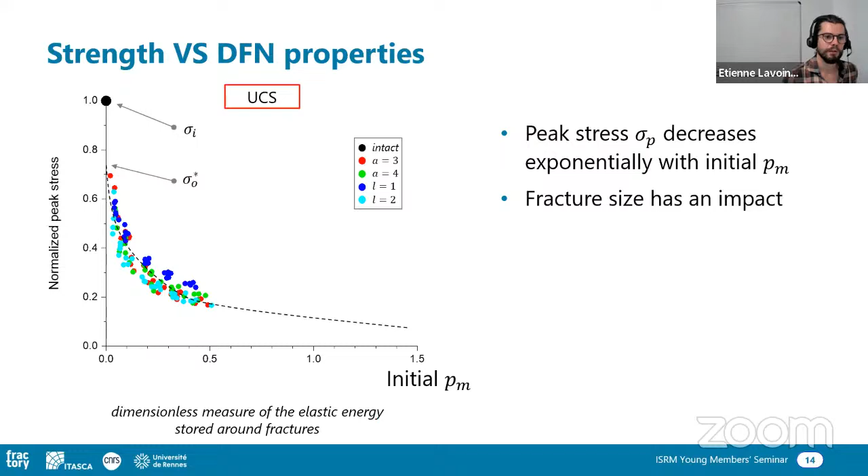This is not the topic here. You mean considering fluid flow impact, like hydromechanical coupling? This is not done here, but this would be obviously interesting. But this is already quite complex to understand. First the mechanics, but maybe.

So the first phase was elasticity. The second phase is strength. Maybe the third phase will be hydromechanical properties. This would be an interesting project, but we already have another project that we call permeability, where we are trying to link the impact between stress and the permeability of the network, but not using the synthetic rock mass approach.

Have any questions? Otherwise, I have a second one. Yeah.

Because you showed in one slide quickly the power law, your fracture distribution, fracture size. So now I'm wondering, is there any limit or boundary up to which resolution you need to model your fractures? Can you stop at a certain size?

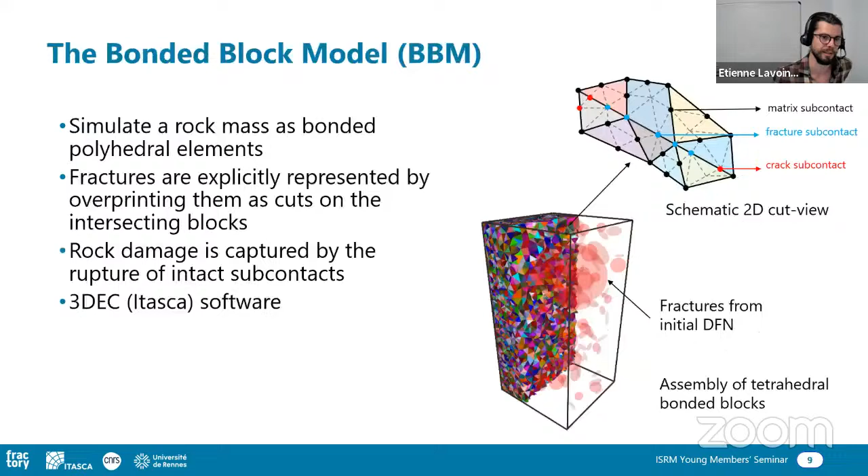So it's quite a long process, given that we want to cover hundreds of simulations. I said I had 120 synthetic rock mass specimens, but now that I have a new parameter, the frictional properties, I need thousands of simulations to make the analysis, so it's quite complicated.

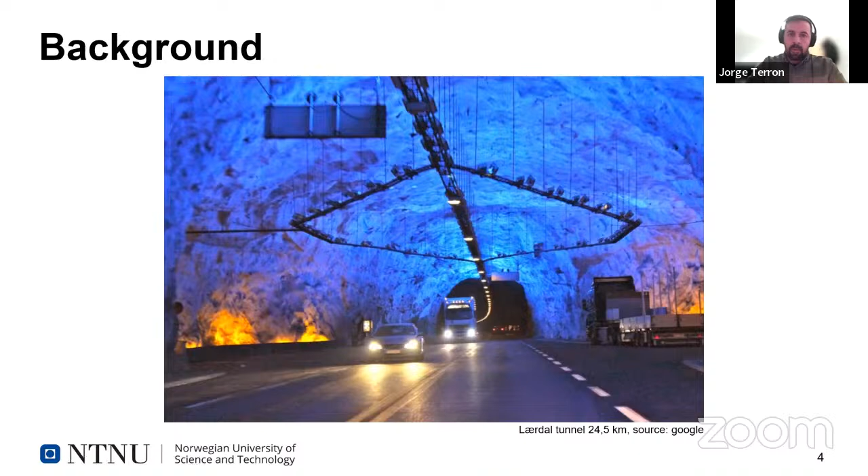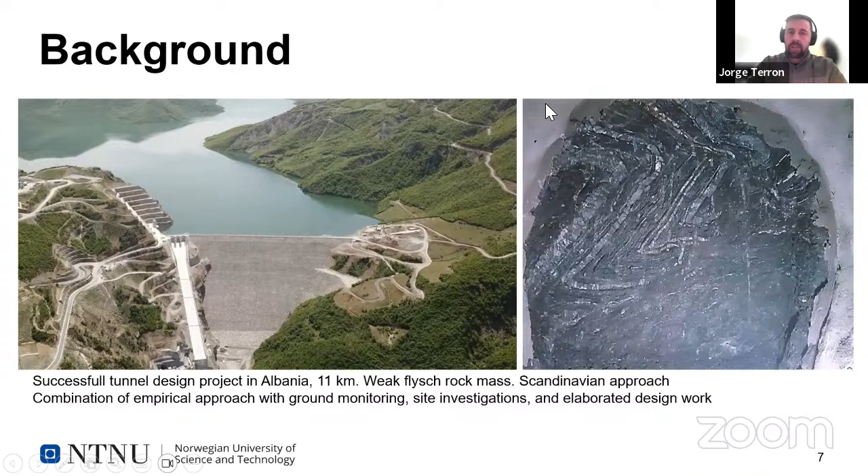At the end, the PhD is very much focused on this because we observed that this approach is working when you involve several methodologies. So you don't actually need to have either black or white, either weak ground engineering or hard rock engineering like we do in Norway. You can actually involve several methods. This is the basis of the hybrid approach that I am going to present today.

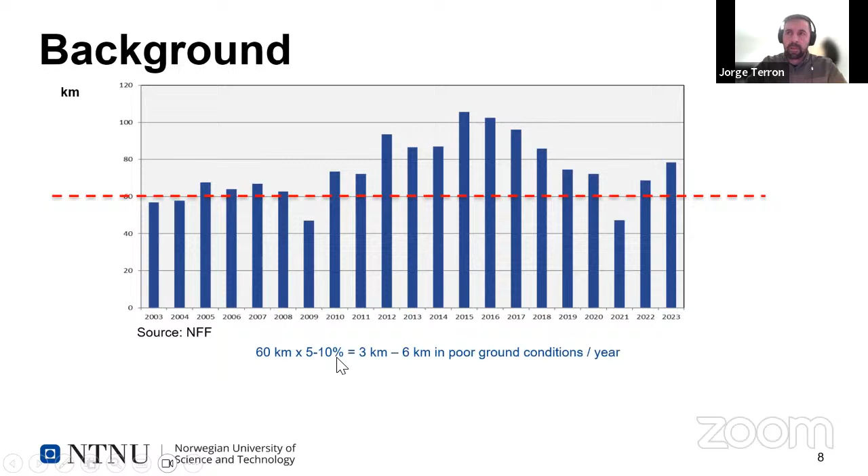A bit on the motivation: if we look at the number of kilometers that Norway builds of tunnel each year, it goes up and down depending on the politicians and so on, but on average we have about 60 kilometers of tunnels each year. According to some literature and experience, about 5 to 10% of those tunnels are constructed in poor ground conditions requiring heavy support.

That means 3 to 6 kilometers of tunnel each year are built in poor ground conditions. Looking at this publication from Høien et al., up to 50% optimization could happen in the design of permanent support in those 3 to 6 kilometers. That means we have a potential to save about 1,500 to 3,000 of heavy tunnel support each year in Norway. So there is obviously a good motivation, not only economic, but also the potential savings in construction time and the savings in carbon footprint emissions.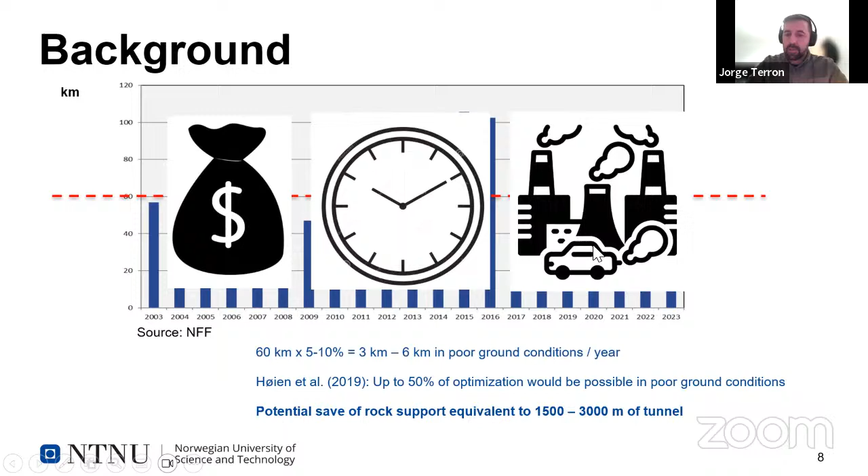If we look at the design principles in Norway for rock support design, basically we use the rock mass as a bearing construction. So we normally implement rock reinforcement with rock bolts and shotcrete so that we keep the blocks in place. As long as the rock is in place, then a rock arch can be formed or generated around the tunnel. So basically it's the rock mass that takes the loads.

So basically these principles are based on the following: in the first graph at the top, you have to the left massive rock, and more to the right, more joints and weaker rock. The weak rock or weak infillings in joints are represented by black color. So basically, in jointed rock, you only need rock reinforcement to keep rock blocks in place so that a natural arch or pressure arch is formed. Then it's the rock mass that takes the load.

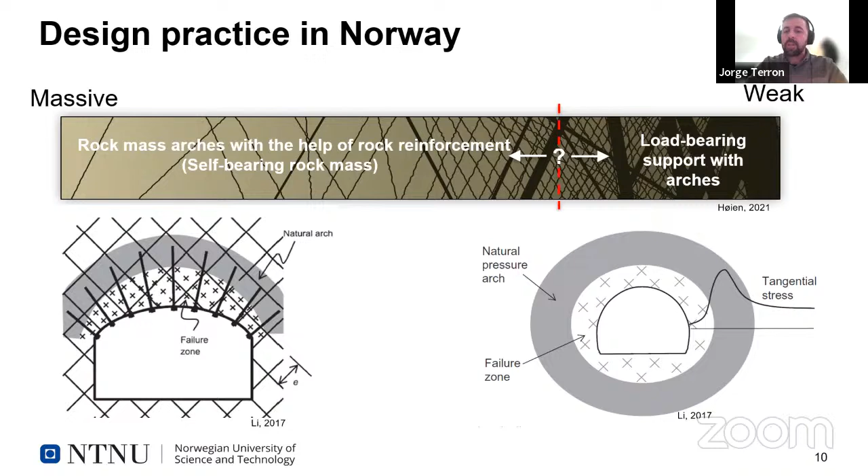So coming back a little bit on the Norwegian approach, it's basically shotcrete applied at the face as permanent support, and rock bolts fully grouted as permanent support. In areas with poor ground conditions where you need load-bearing support, we actually install the RRS, which is basically those beams of shotcrete installed circumferentially to the tunnel, then reinforced with steel.

So if you adjust the center spacing of those beams, or also the amount of steel reinforcement or the thickness of those beams, you can adjust the design to the load conditions at the face. So it's a very simple way of design, but it has been working quite okay during the last years, besides the failures that I just showed you.

So the objectives of the research, I can summarize in these three. First was to identify in which ground conditions rock reinforcement and load-bearing support are necessary. Basically, it's to go from the current support strategy, as you can see in the top right figure, to this figure in the bottom right.

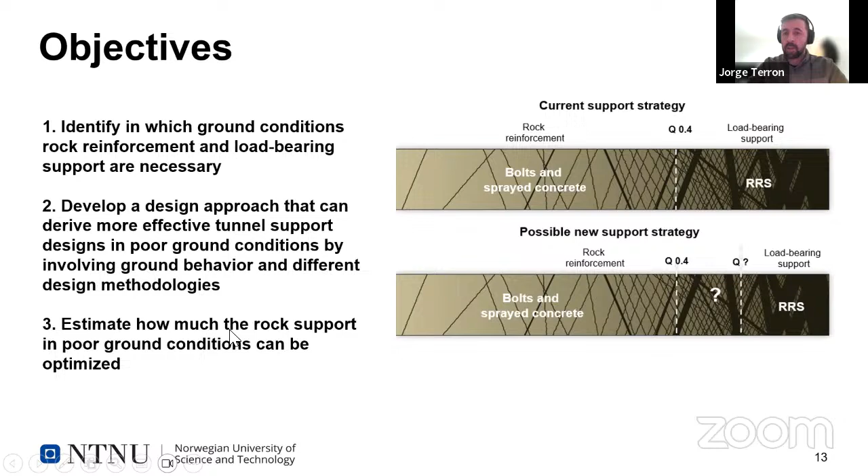So we need to define in which conditions we may want to implement a different procedure, in this case a hybrid approach. The second objective is to develop that hybrid approach, and the third is to estimate how much savings in rock support we can optimize with this hybrid procedure.

So here in this slide, I'm showing you the general methodology from 1 to 5. I was very lucky that my co-supervisor is working at the road authority, so I got hundreds of case records.

But I had to filter and sort all of them, because the research in the PhD is focusing on poor ground conditions. So the criteria was to use rock mass conditions with the Q value below 1, and also case records of recent tunnels. The reason is that old road tunnels in Norway are also designed empirically, but some modifications came into the guidelines in Norway some 10, 15 years ago.

Another criteria was cases where we had available deformation monitoring results, because this would allow us numerical calibration of the input parameters. Also, the case records needed sufficient and quality information about in situ stresses and the properties of the rock mass.

So the second step was rock mass characterization. Most of the rock masses were already characterized, but in some other cases we had to take samples and test them, and that's why I give tribute to the master students also. So step number 2, I did part of it, but also master students contributed.

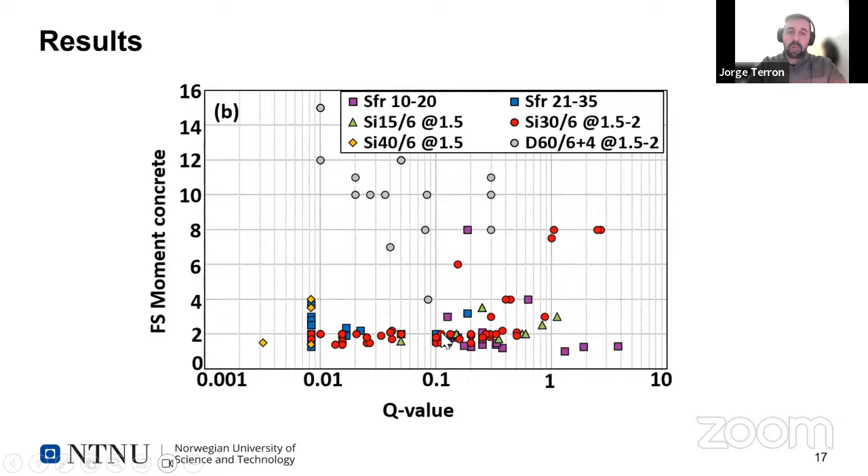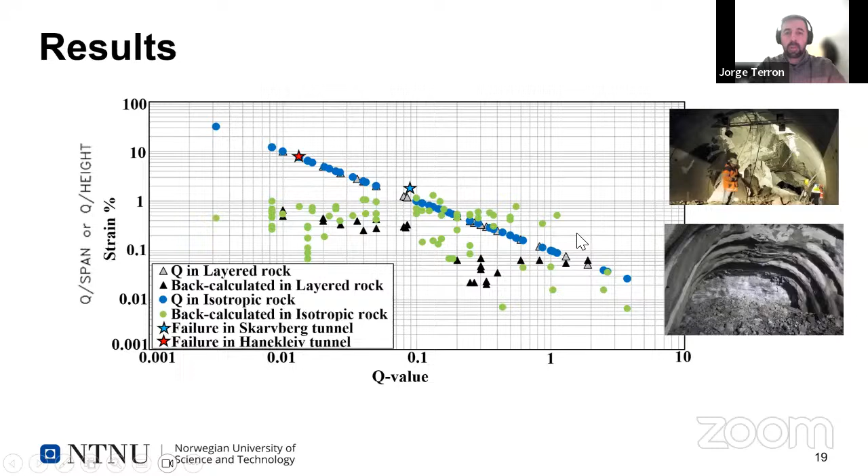I could show you more results, but since we have only 20 minutes, I'll just show you these. Based on those results, we evaluated the performance or ability of these three main design methodologies to perform different characteristics, like the evaluation of factor of safety and support, whether the appropriateness of the support design can be evaluated, or the consideration of other tunnel geometries than circular. So we created this kind of matrix that is then implemented into the next slide I will show you.

So this is how the hybrid approach looks like. Basically, you have these 6 main types of ground behavior in Norway. Once you have selected one representing the tunnel conditions at the face, you evaluate the loading and failure mechanisms. This is done empirically. I won't go into the details today, but you can read more in the paper.

I will give you the links afterwards. The idea is that you move vertically through the columns once you've selected the ground behavior type. I don't intend for you to read in detail right now, but you get different recommendations in a kind of guideline. You start from recommendations regarding site investigations, then recommendations for how to use the empirical methodology—not only the Q system, but also GSI and RMR—and also analytical methods, numerical methods, and how to use monitoring results. Based on all these methodologies and recommendations, you get a recommendation for the support design.

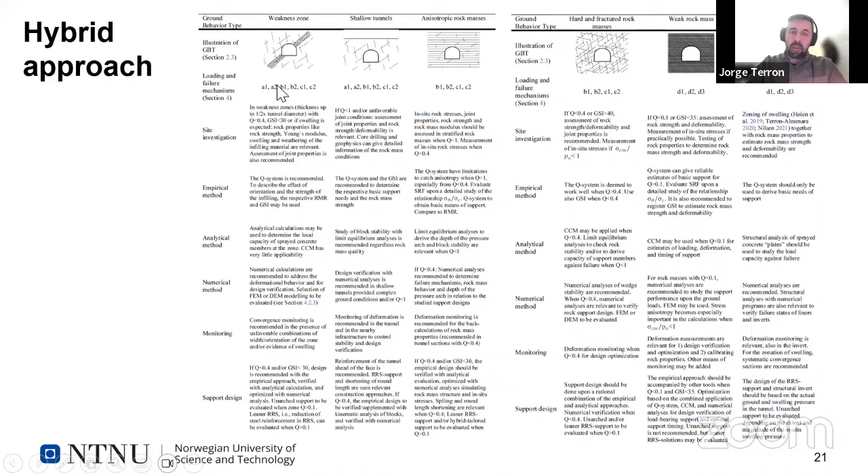So it looks a bit complex, but the way we constructed it was quite simple, so that it can cover as much ground conditions as possible.

We have already published 2 articles. One of the results is in these slides, on the direct application of this hybrid approach in layered rock masses. This is the same tunnel I showed you before with a failure in the roof. We conducted the hybrid approach, and among others, we conducted UDEC calculations.

So we, in fact, observed some variations. Basically, the support is conservative, and the potential economic saving was 0.3 million euros in just 175 meters of tunnel. It might look like a very little amount of money in the context of tunnel construction, but in terms of reducing the risk of tunnel collapses and failures, like the one I showed you, that is much more costly. So this 0.3 million euros does not represent that failure, obviously.

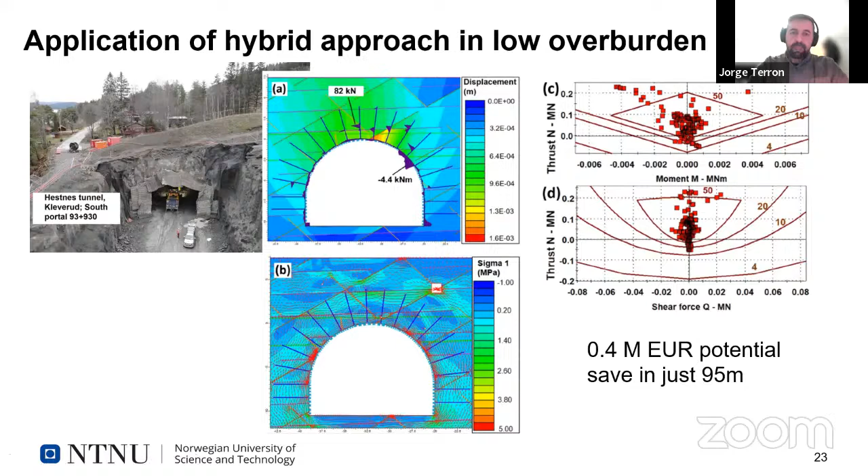So moving to the conclusions: yes, it is possible to optimize and achieve more adequate designs of tunnel support in poor ground conditions in Norway. Such optimization can be found principally in rock masses of quality between 0.1 and 1. In situ stresses and rock mass properties have a direct influence on the ground behavior, and this is normally not captured by empirical classification systems.

With the use of a hybrid approach, we have seen that it is possible to involve different methodologies. They are known and relatively old methodologies, some of them, but what we have presented is a new approach where we give recommendations for how to integrate all of them.

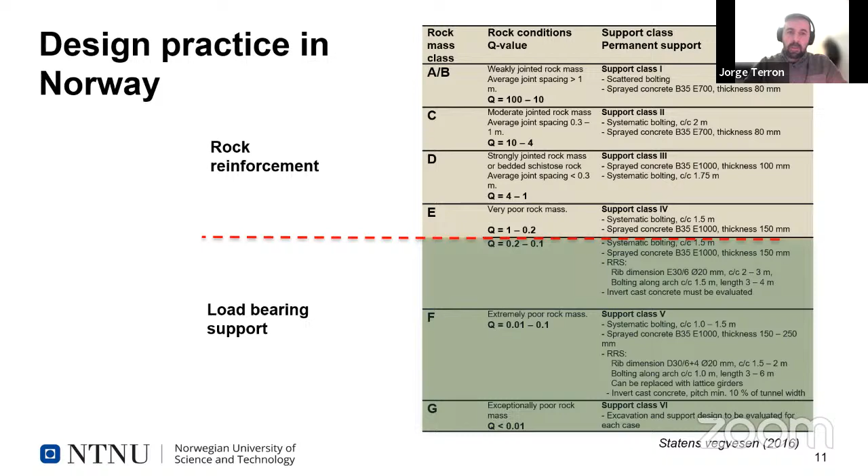Regarding our research, most of the tunnels we have picked up here, I also forgot to mention, are between 7 or 8 to 10 or 11 meters of diameter. So it could have some impact on the results, maybe, but I don't think it could be quite significant. This is at least the research we have done, so I don't know if I answered your question by that.

Yes, absolutely. From the experience I have, if we manage to decouple the design of the rock support from the rock mass classification and put a step in between, we can obtain a lot of savings, because it makes a difference whether you excavate a 5-meter diameter or a 24-meter diameter underground opening. In our project we are excavating in the full range, from 5 to 24 meters.